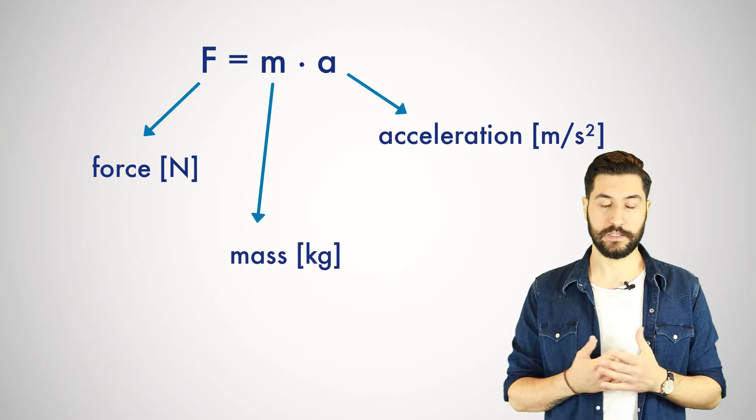A good guide value is, for example, a well-trained construction worker with a weight of 100 kilograms, who causes a force of 1 kilonewton due to the acceleration of gravity. We engineers consider forces to be somewhat simplified because our calculations are usually idealized.

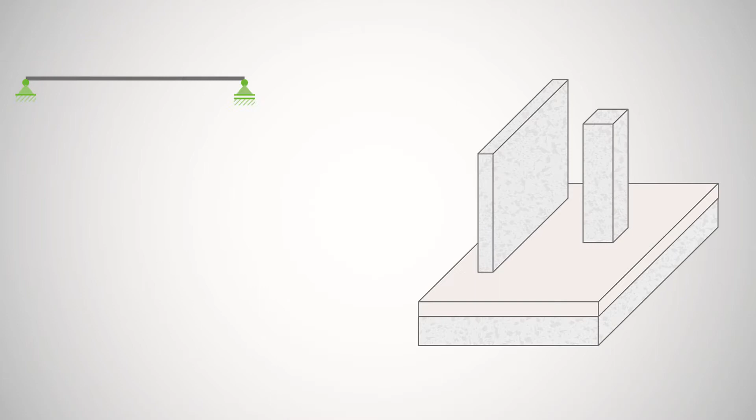Forces that act permanently or only sometimes on a structure, such as the self-weight of the structure, wind, snow, or even vehicles are called loads. We can divide these into the following types, depending on the target surface. Single loads. These are forces applied at specific points by an arrow indicating the direction and the point of application, such as the load transfer of a column to a foundation.

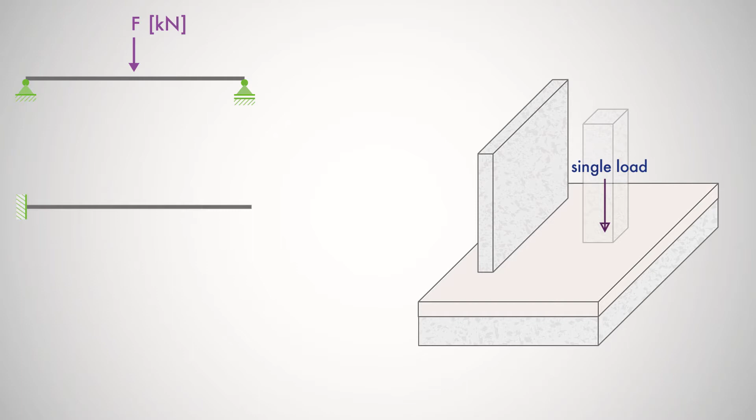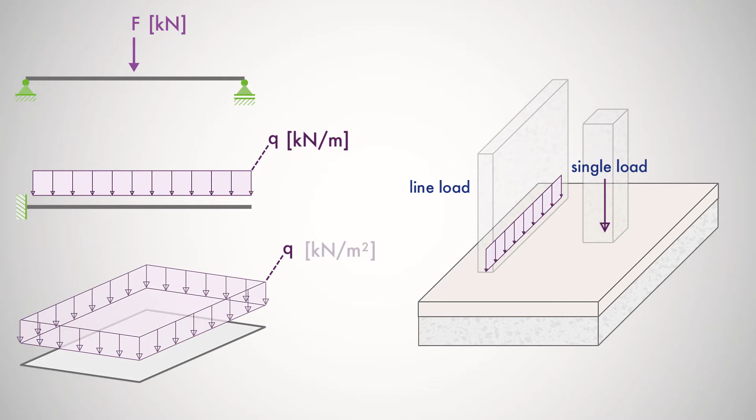Line loads. These are forces distributed over a certain length, indicated by a series of arrows, such as non-load-bearing walls. And forces distributed over a certain surface are symbolized by a surface of arrows, such as the floor structure of a floor slab. These are called surface loads.

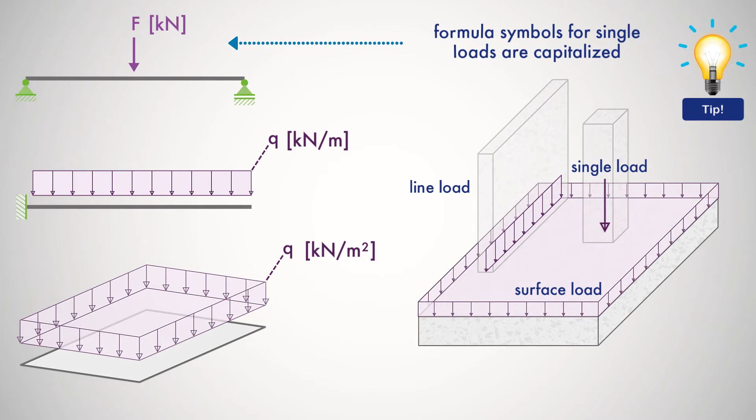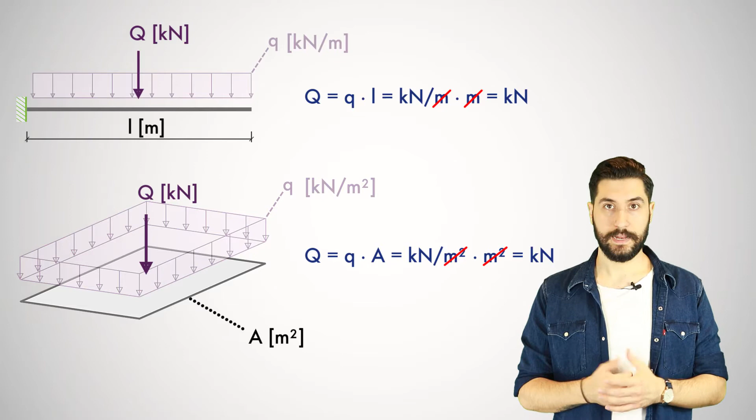You can find the resulting concentrated load from line loads and surface loads by multiplying it by the respective length or area. However, there are not only constant line or surface loads. Trapezoidal or triangular loads are also very common in structural design. For example, by the load distribution of a floor.

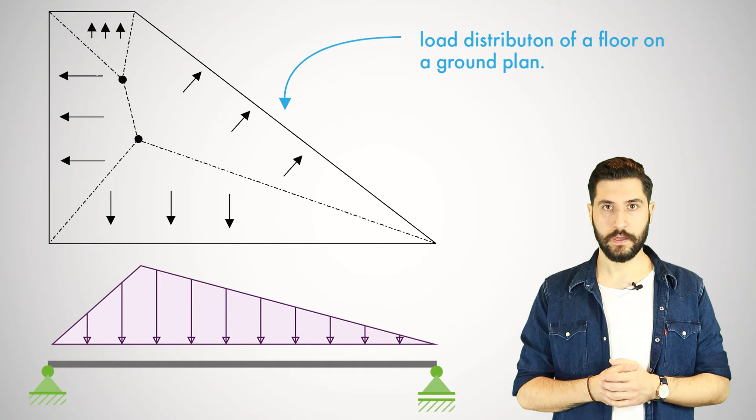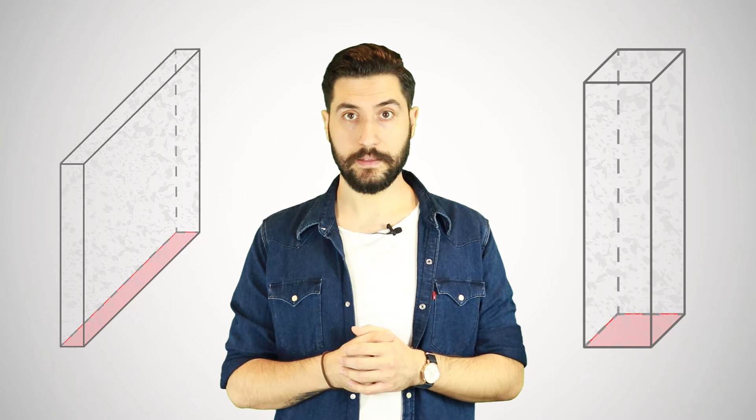Point loads and line loads do not really exist, because all structural components or bodies have an action surface, albeit a very small one. Simplifying and on the safe side, we do not consider them as surface loads, but idealize them. In the practical implementation in the structural analysis software RFEM, it looks something like this.

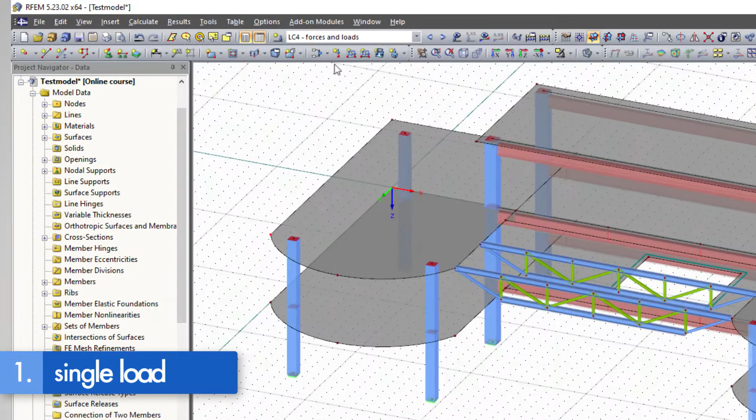First, we select the desired load case in which we want to enter our loads. A single load corresponds to a nodal load in RFEM, so we simply click the node where we want to apply the load. Then we select New Nodal Load and enter our load parameters.

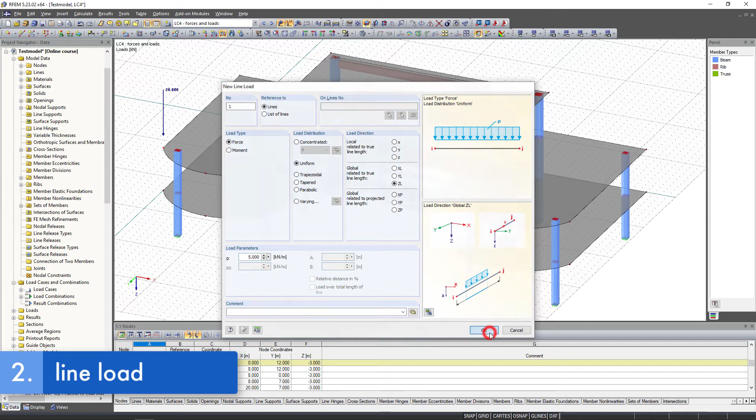To enter a line load, we have to differentiate between line loads and member loads in RFEM. If we want to apply the load to a surface that is surrounded by lines or on which lines are located, we use line loads. For beam structures, we use member loads instead of line loads.

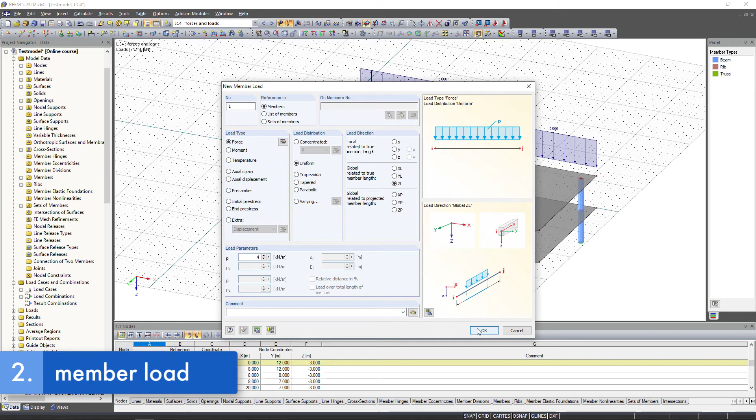Finally, we enter a surface load. To do this, we click New Surface Load, enter our load size, and select our desired surface.